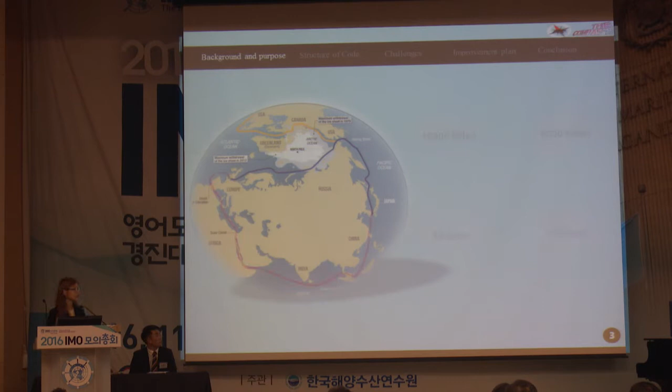Now let's start with the background and purpose of the polar code. The melting of the Arctic sea ice due to global warming and the development of navigational technology has drawn international attention to the development of the Northern Sea Route. The Northern Sea Route, which connects Asia to Europe, shortens the shipping route by 40% compared to the current Southern Sea Route. This means that the sailing period shortens from 30 days to 20 days.

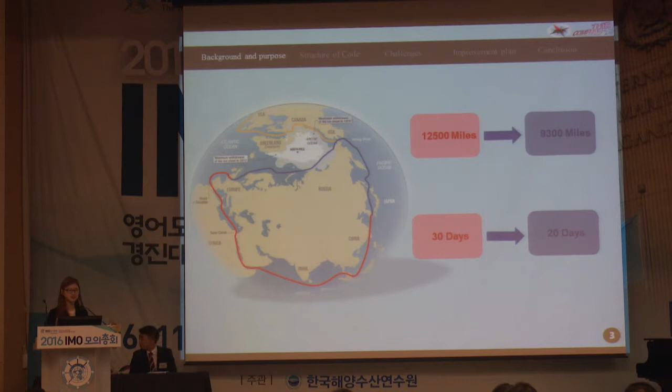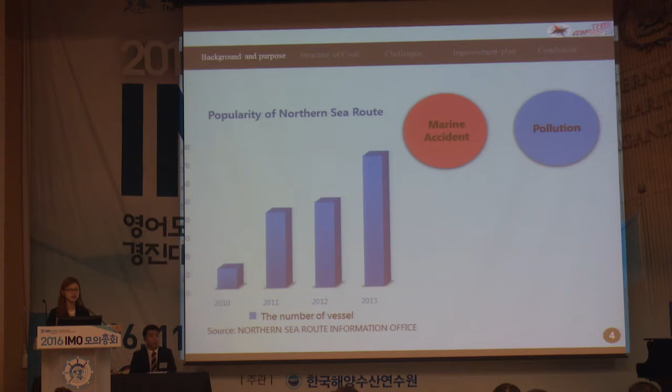Therefore, the International Maritime Organization has prepared the enactment of the Polar Code. The Polar Code is made to establish the requirements for vessels navigating in the Arctic and the Antarctic. Nevertheless, the regulation regarding black carbon is yet inadequate to handle the potentially detrimental impacts that it has on the climate of the Arctic area.

Although the shipping emissions of black carbon is yet relatively small at present, the shipping emissions in the Arctic are projected to increase dramatically over the next several decades. In fact, it is expected to rise by up to 5 times by 2030 and almost 20 times by 2050.

Such a drastic and dramatic increase in emissions urges the need for regulation of the shipping emission of black carbon. We are therefore here to claim that the International Maritime Organization should be aware of the magnitude of this problem and develop regulations regarding the shipping emission. More specifically, we propose amending 2 different treaties, mainly the Polar Code and also MARPOL.

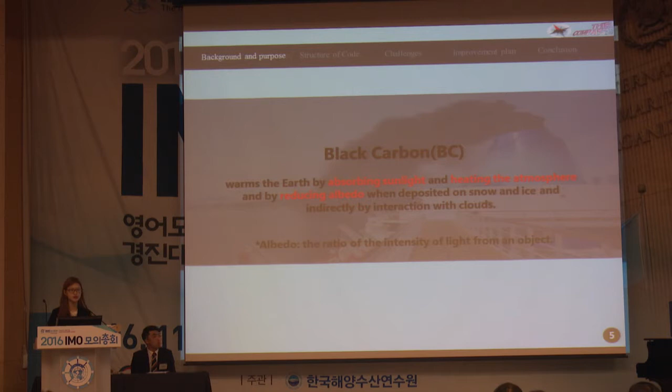Now, before I move on to the specific amendments made on the Polar Code, let's take a look at the structure of the code. The Polar Code is comprised of 3 parts: first, the introduction, second, Part 1, and then Part 2. Part 1 is subdivided into Part 1A and Part 1B. Part 1A contains mandatory provisions on safety measures, while Part 1B contains recommendations on safety.

Part 2 is also subdivided into 2 parts. Part 2A contains mandatory provisions on pollution prevention, while Part 2B contains recommendations on pollution prevention. Today, we would like to further elaborate on Part 2A and Part 2B in relation to black carbon.

Although Part 2A and Part 2B in the Polar Code contain detailed instructions regarding other environmental matters, content related to air pollution is completely excluded in the Polar Code. Therefore, we suggest that the IMO should add a whole new chapter, Chapter 6, the prevention of air pollution from ships, so that regulations regarding black carbon could be included.

Before we go on to the details, our next teammate will be addressing the detrimental impacts of black carbon.

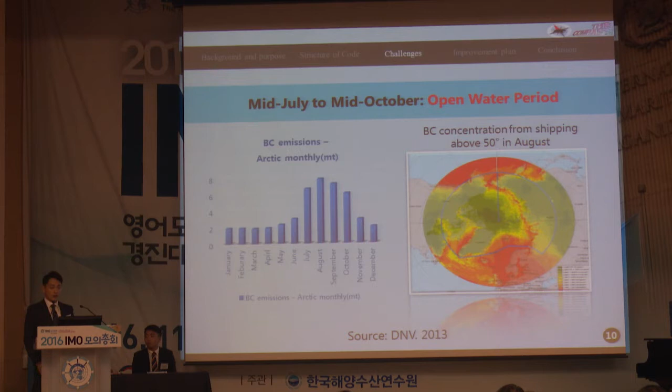The next map shows the distribution of black carbon existing in the Arctic. This means a significant amount of black carbon is emitted along ship routes. What this indicates is there is a direct correlation between the amount of black carbon existing in the Arctic and ship operation in that area.

The effects of black carbon on the global climate can be classified into three categories: firstly, direct effect; then indirect effect; and lastly, snow ice albedo effect.

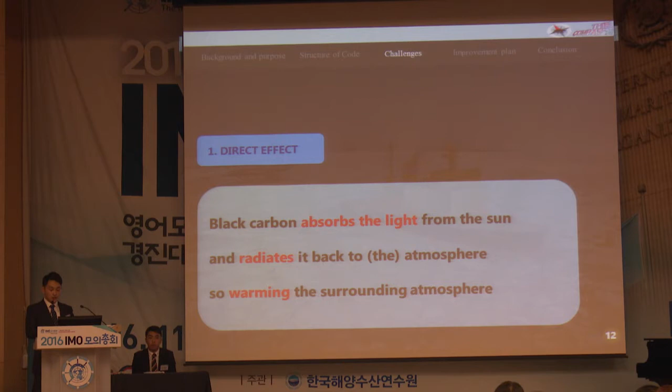To begin with, black carbon has a direct effect. Black carbon absorbs light from the sun as well as the Earth's surface, then radiates the light back to the atmosphere, warming the surrounding atmosphere as well as the entire planet.

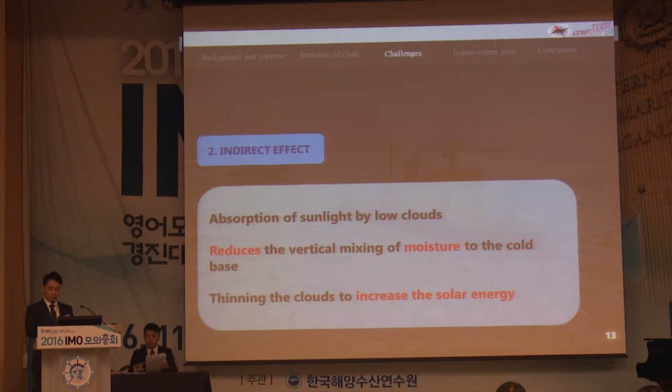Secondly, black carbon also has indirect effects. Absorption of sunlight by low clouds increases the stability of the atmosphere below the clouds. This decreases the vertical mixing of moisture to the cloud base. Such a process increases the solar energy input that reaches the Earth's surface.

The last one is related to the snow ice albedo effect. The deposition of soot increases melting of ice masses. This decreases the surface albedo available to reflect solar energy back into space. The decreased snow albedo would increase surface temperature, and increased surface temperature would once again decrease the snow cover.

One unique factor of black carbon is that it has a short residence time, unlike other pollutants such as carbon dioxide. This means that when the emission of black carbon is decreased, it will bring immediate benefits to the surrounding environment. Therefore, it is urgent that efforts should be made to reduce the amount of black carbon emitted.

The three concrete measures to achieve the goal of reducing black carbon emission in the Arctic Sea will be explained by the next speaker.

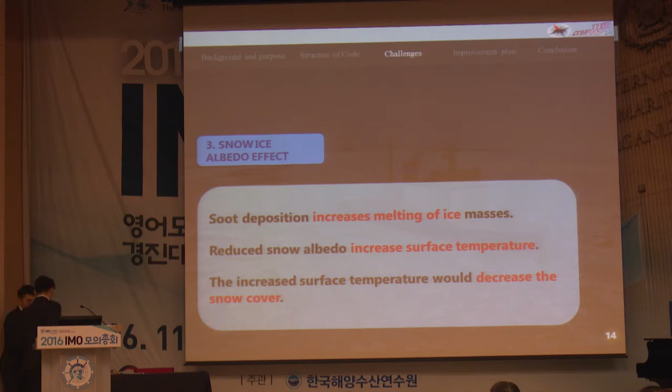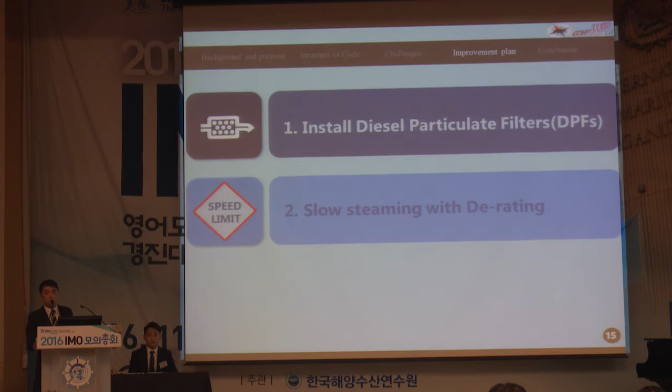Now we will be focusing on three technologies and operational practices that can reduce black carbon emission from shipping in the Arctic area. First, installing diesel particulate filters on vessel engines. Second, slow steaming combined with derating. And lastly, including the Arctic area in emission control areas.

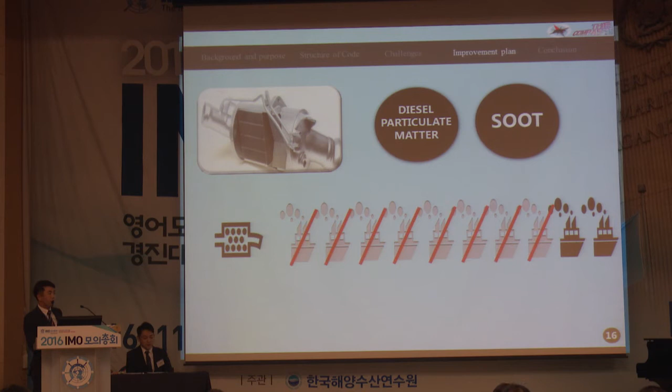First, installing diesel particulate filters on vessel engines. DPFs are after-treatment devices that are particularly effective at controlling diesel particulate matter and soot. It is estimated to reduce marine black carbon emissions by 80%, according to IMO reports. However, doubts have been expressed on the feasibility of installation. Therefore, we have brought some real cases of DPFs used on real ships.

First, a DPF system was installed on a diesel engine on an MOL-operated ocean-going vessel in February 2012. This is the world's first application of a self-cleaning DPF on a diesel engine on an ocean-going vessel. In addition, a Dutch company, Burger Maritime, manufactures and supplies DPF systems considering the size of engine rooms and the kind of ships. They also provide 24/7 after-sales service to ships at European ports.

Now, knowing that the installation of the filter is a feasible plan, let's look at how it works.

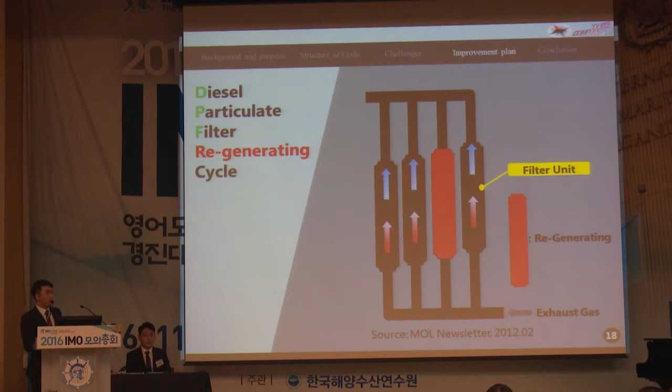This device incorporates a filter that relies on silicon carbide ceramic fibers. The filter collects particulate matter when the exhaust gas of the engine goes through it. Furthermore, it is a self-cleaning system that automatically combusts and eliminates the particulate matter, which is called regenerating. This allows for continual operation without clogging of the filter and requires no maintenance by seafarers.

Let's move on to the second solution: slow steaming with derating. Slow steaming refers to the practice of operating a ship at less than its maximum speed. When slow steaming is combined with derating, it is estimated to reduce marine black carbon emissions by approximately 15%.

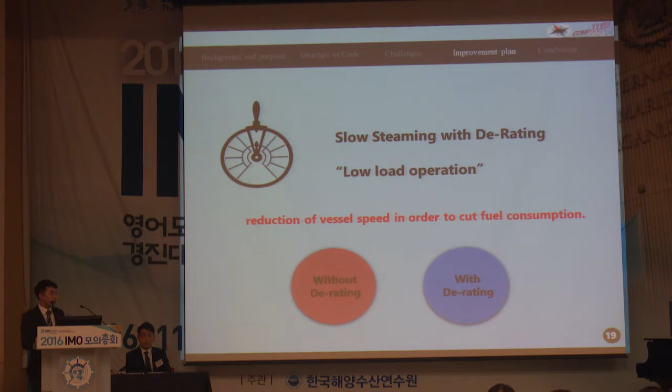The key to this solution is that the derating system is an essential process for slow steaming in order to reduce black carbon emission. Derating is a process of making adjustments to the engine combustion process in order to increase fuel efficiency.

Lastly, the last solution is to include the Arctic area in emission control area. Sulfur emission control areas, which are called SECA, are sea areas in which stricter controls were established to minimize airborne emission from ships as defined by MARPOL Annex 6, Regulation number 14. If the Arctic region is included in the ECA, the restriction of sulfur content in fuel will be applied to the ship passing the Arctic Sea.

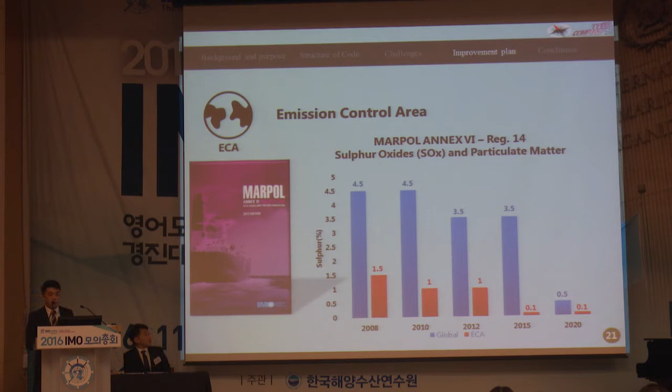Switching to low sulfur fuel can reduce marine black carbon emission by 30 to 80% depending on the fuel quality. Moreover, it can also enable the use of particulate filters for more dramatic particulate matter and black carbon reductions. This chart shows the difference of the sulfur content between ECA and non-ECA.

Finally, let's move on to conclusion. Considering that the three solutions are available, we are here to propose amending the Polar Code Part 2A, Part 2B, and MARPOL Annex 6 Regulation 14. The amendments should look like this. We have added Chapter 6, Prevention of Air Pollution from Ships, to the existing Polar Code, which ends with Chapter 5.

Part 2A, which contains the mandatory provisions, accommodates the first solution, which was to install diesel particulate filters on ships. The first part consists of definitions. First, diesel particulate filter means a device designed to remove diesel particulate matter or soot from exhaust gas of a diesel engine. Second, ships constructed means the keels of which are laid or which are at a similar stage of construction. And third, existing ship means a ship which is not a new ship.

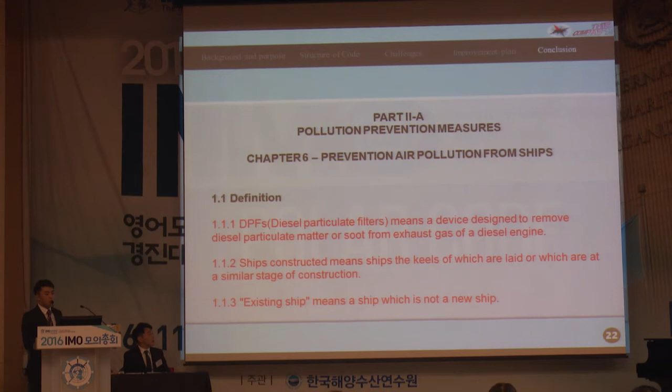Next, the structure requirements should be clarified as the following. First, for category A, B, and C ships constructed on or after 1st January 2017, DPFs shall be installed on board. And second, DPFs shall be installed on all ships of category A, B, and C constructed before 1st January 2017 by the date of the first scheduled dry docking after 1st January 2017, but not later than 1st January 2020.

Then the second solution of recommending slow steaming combined with derating is contained in Part 2B. It also starts with clarifying the definitions. First, slow steaming means reduction of vessel speed in order to cut fuel consumption. Second, derating means decreasing engine load in order to decrease specific fuel oil consumption. After definition of terms, the specific guideline is as follows. Ships are encouraged to implement slow steaming combined with derating when operating in Arctic waters.

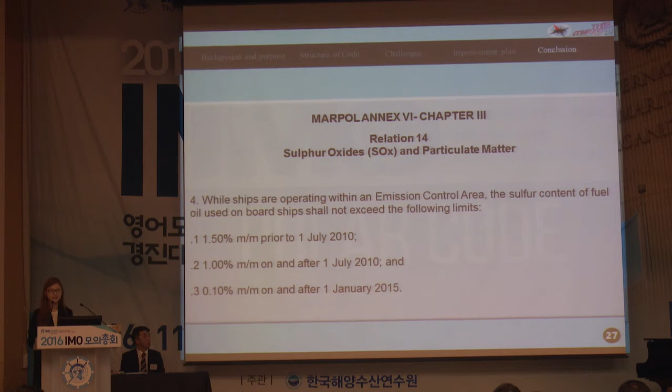As demonstrated from this entire presentation, the emission of black carbon has serious impacts on the climate of the Arctic region. In the long term, this is not just a problem of the Arctic, but the problem of the entire human race. We need this to be fully acknowledged by the International Maritime Organization, and therefore, we urge the approval of this proposal. Thank you.

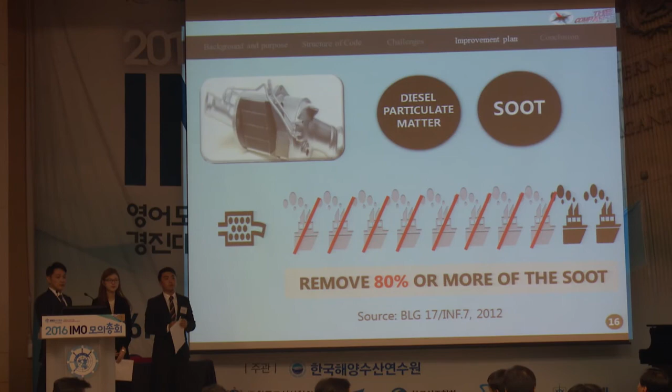Okay, thank you. Well, as 2030 has dealt with a similar topic, we clearly see the similarities and the differences between the proposal from your team and that. Anyway, do I see any other card for the students? In such case, do any judges have a question? Yes, please. Thank you, Chair. I have one question. Is there any other shipping line using the DPF system besides MOL?

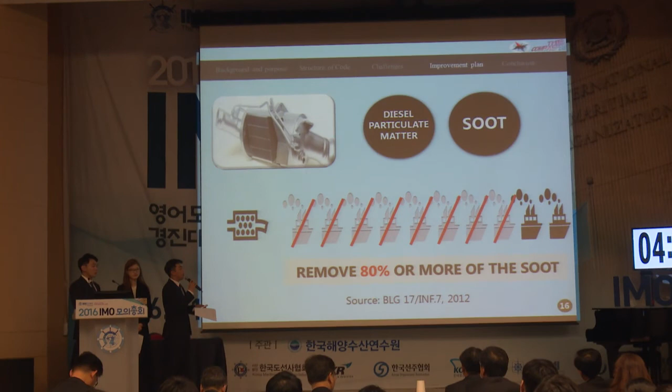We cannot find other shipping lines or shipping companies using the diesel particulate filter, but we can ensure that a Dutch company is manufacturing the diesel particulate filter and making a lot of machines to reduce air pollution. They are also manufacturing and supplying to ships in European ports. And now they also consider the size of engine rooms and the kind of ship. I think that means there are some ships now also using diesel particulate filters.

Well, the diesel particulate filter is actually in the process of becoming a feasible plan. So it's not widespread yet, but we believe that there has been progress in the usage of it. Thank you, sir. Any more? Mr. Kim?

Thank you for your presentation. I was going to ask the same question to Thousand Sunny when they made a presentation. I believe there already exist SOx and NOx codes, and also the bunker fuel thing. What you are trying to do is to make it mandatory that black carbon is not emitted in the polar area. Could you tell us the correlation between what you are trying to suggest and the existing conventions and codes, such as NOx and SOx? Could you please rephrase the question? Could you tell us the gap between the existing codes or conventions and your suggestion?

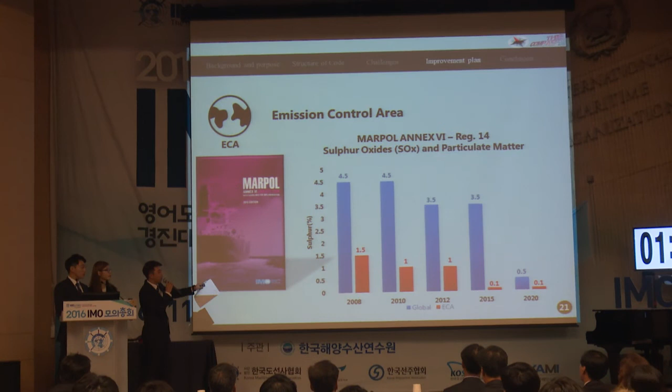The same question was also asked of Thousand Sunny on this topic. If we are not included in the emission control area for sulfur, following the regulation of the blue curve, we should now have a fuel sulfur content of 3.5%, but from 2020, in the Arctic area, we should have fuel oil with a sulfur content of 0.5%. But we suggest the Arctic area be included in the emission control area to commit to the red curve, a 0.1% sulfur content from now on. This is my answer.